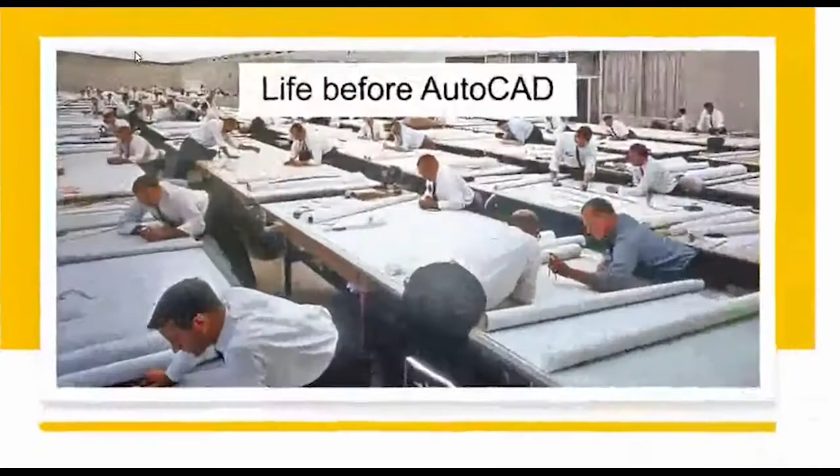Before we go into BIM, we have to understand what life was like without BIM. This is life before AutoCAD, and there was life before that too. Cave dwellers had to draw something in order to build it - the people rebuilding the insides of caves or building huts weren't doing it out of their mind. They must have created some kind of drawings, even if on sand or papyrus leaves or birch, or all the things people used to write or draw on.

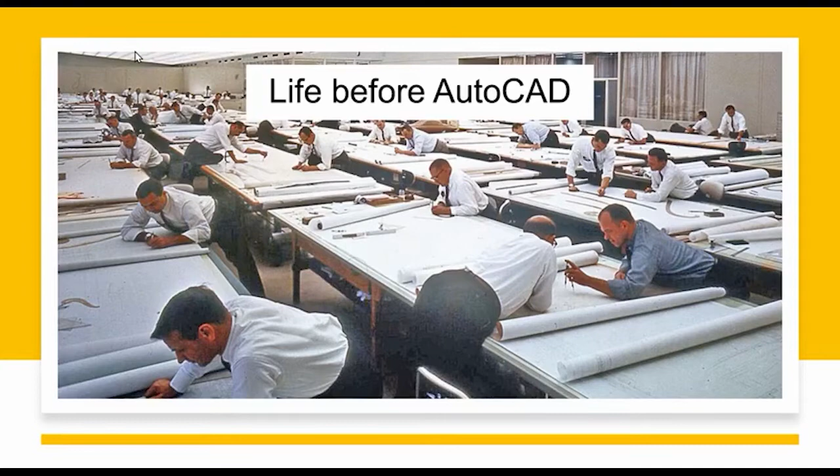Then we invented paper and started using it as a medium to draw lines and shapes denoting certain elements in construction. It's still lines - a thick line means structural wall, a slightly narrow line would be an architectural wall. Or you have to write it down: this is a structural wall, it has so many things, and you have to write the general notes - this much thickness, this much concrete, what grade of concrete, this much steel, internal plaster, external plaster, etc. You have to write these down just by looking, because if there are no letters or dimensions, you will not know what this wall is.

And then what happened? Computers came, and with computers we had AutoCAD. Nothing changed - this is very important to know. The guys who were building huts were drawing on sand or some other medium, then paper came and we did the same drawings on paper, and when computers came we used computer programs to draw those same lines and shapes.

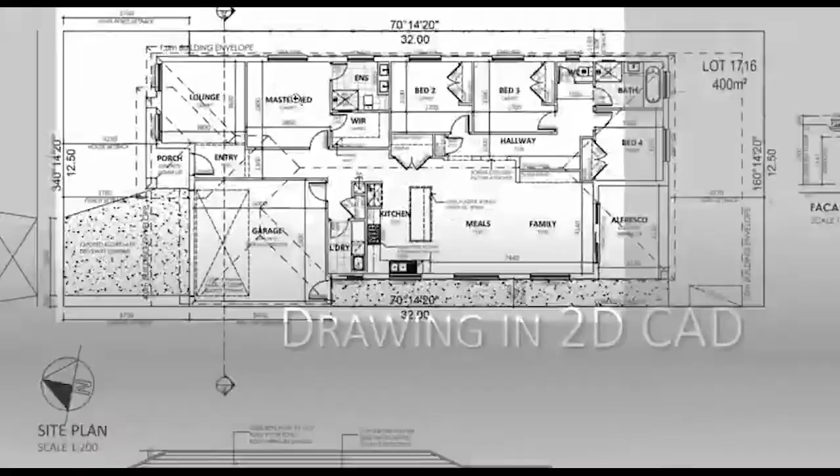If I take away all these writings, how would anyone know what these stand for - what this wall is, for example? We realized we were spending so much time doing this, and then spending a huge amount of time again because the guys in construction actually building it realized what you had drawn had so many mistakes - because the structural engineer refused to coordinate with any of the mechanical or electrical engineers or architects.

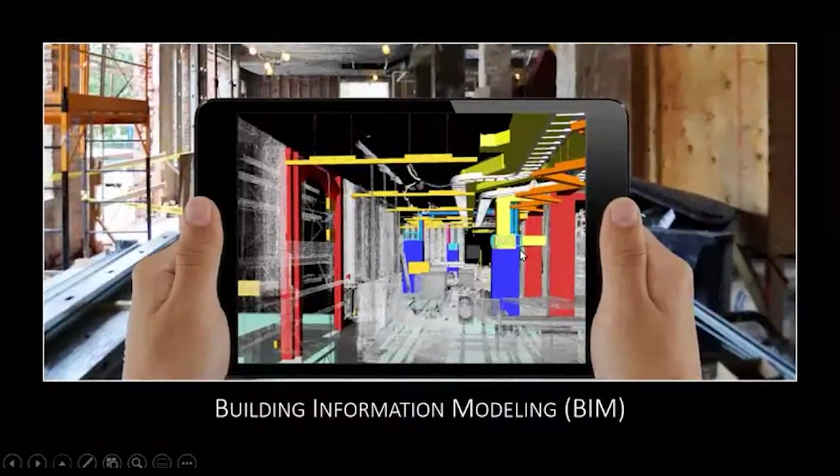But then came building information modeling. What changed? You put the information within the elements. So rather than drawing lines and shapes, people are putting the information there itself. This particular column here will have all the information regarding it - the steel used, the concrete, the grade of concrete, the fire rating, everything, including scaffolding if required - so that what you see is what you get. If you see a clash or confusion in coordination here, it will reflect here, so it's easier to solve.

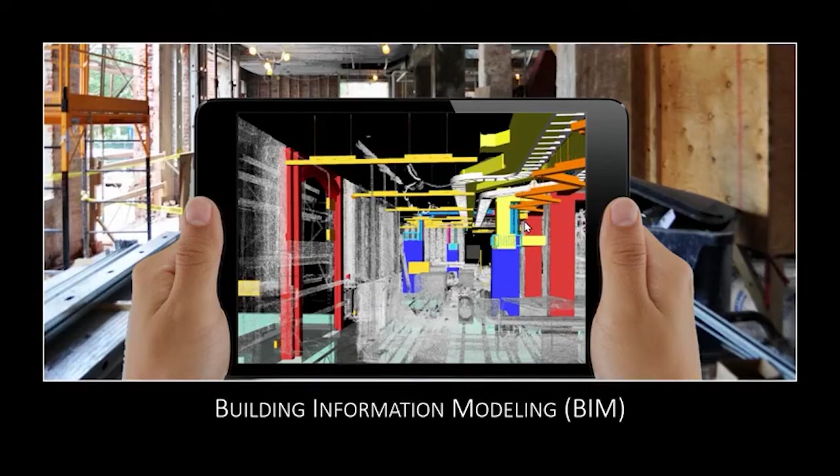So what are we doing? We're creating a digital double. We are constructing a building in a simulated, computerized environment, finding out all the problems associated with it, and once you've found the problems and solved them, you take out all the quantities, cost, everything, and then actually go on site and build it. It's like a genie in a bottle, making a replica of the same building in the next plot.

And now, especially with this COVID situation and people working from home, cloud collaboration has become very important. It was there in all parts of the world where BIM was used, but now even in India - because your consultant based out of Singapore will not come to India right now - so if you have to coordinate with that consultant, you'll have to do it via cloud.

Your architects could be in Ahmedabad, your structural engineer could be in Punjab, your general contractor would be at the project site - maybe your site is in Delhi - your facade design architect would be in Singapore, and your mechanical electrical engineering company would be in Bangalore. How do you see all of these models together? You see it via cloud collaboration.

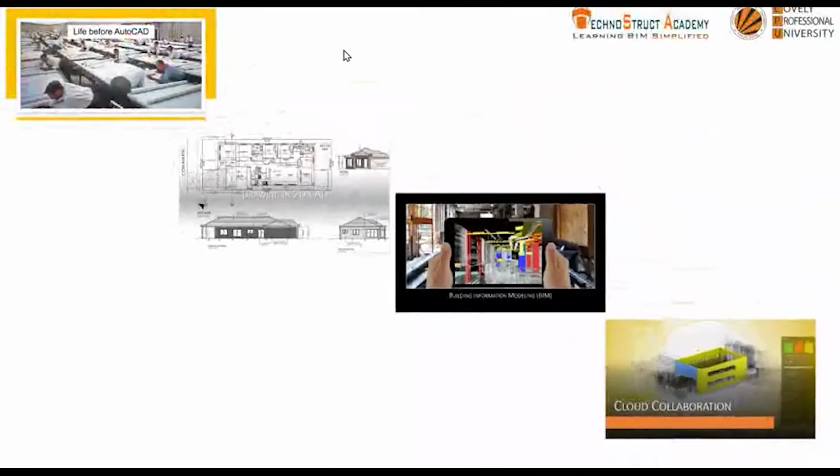In BIM, we talk about levels or LODs, whichever way. If you're in the US, you'll talk about LODs, which is level of detail. If you're in the UK or India, you'll talk about levels. Level zero is nothing, it's just a dot, scratch, there's no X and Y coordinate.

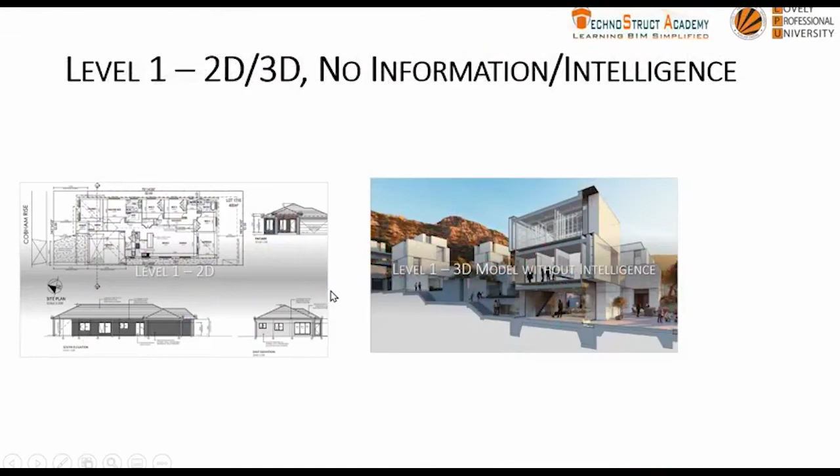Level one is partial collaboration. For example, you will have your 2D CAD drawing, or your 3D model without intelligence, like a SketchUp model or a Rhino model, where you can see the shapes but the shapes have no data. We see all of these images everywhere, like when we see buildings and houses.

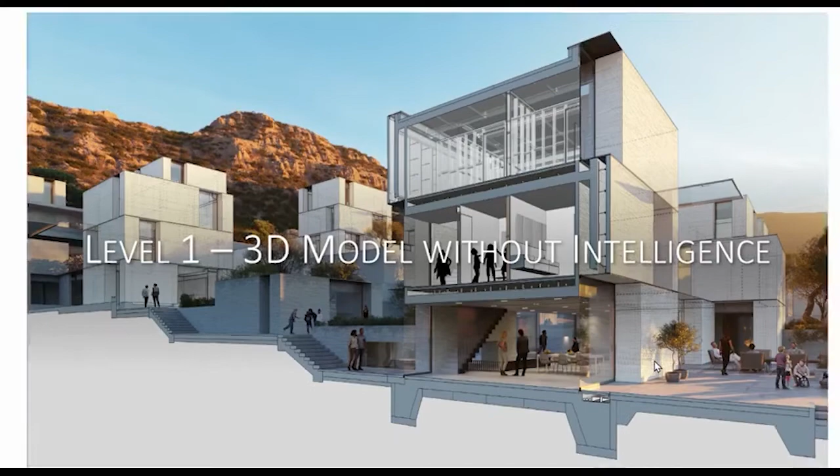In the next level, everybody's creating their own different model. For example, we have intelligent models. The architects are creating their own model, the structural guys are creating their own model, the mechanical, the plumbing, the fire, they all create their separate models.

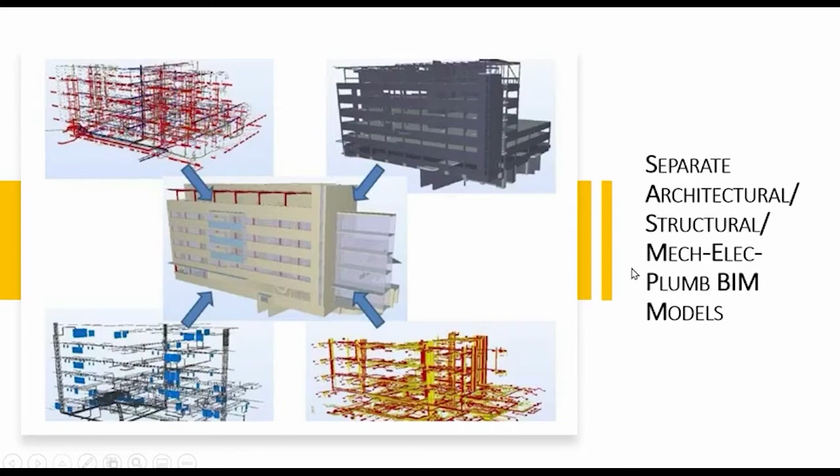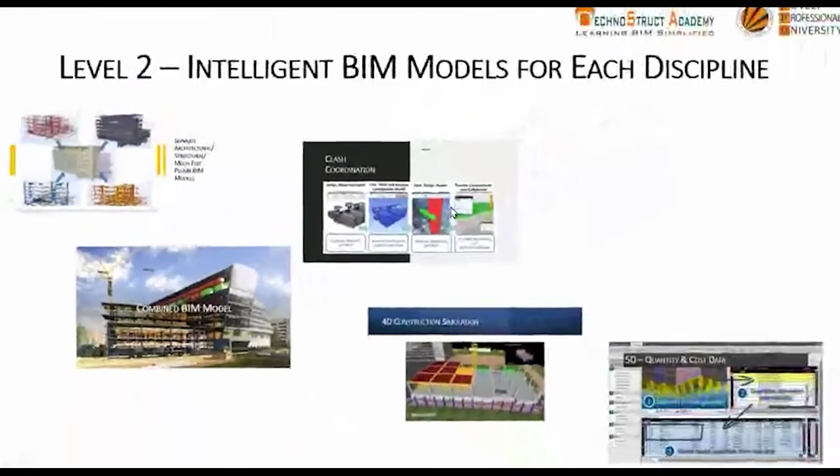And then we create a central model, and put them all together, maybe in Navisworks, like you see here. All the different elements of the model are here: architecture, structure, mechanical, electrical, plumbing. Then you use software like Navisworks to do clash coordination.

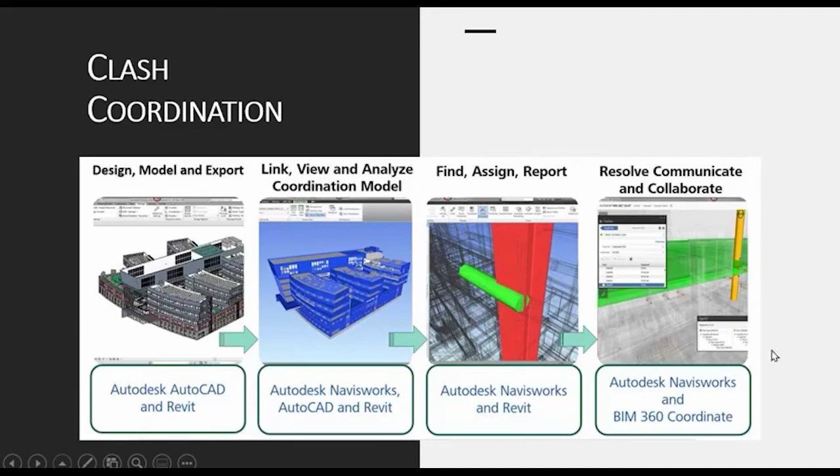At the onset, you can use AutoCAD and Revit to see if there are any problems between the drawings and the model. Then you can use Navisworks, AutoCAD, and Revit to link, view, and analyze the coordination model, and understand all the clashes. You see the clashes here, it's very common on a construction site. Then you can resolve clashes and collaborate on the cloud, which we'll come to in a while.

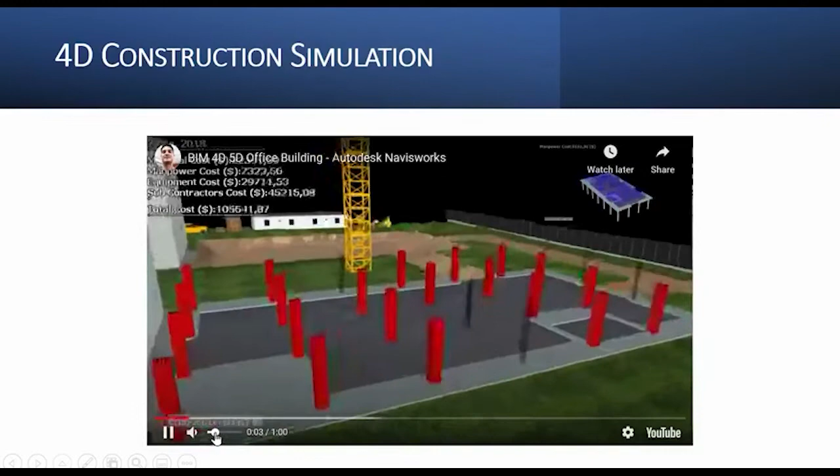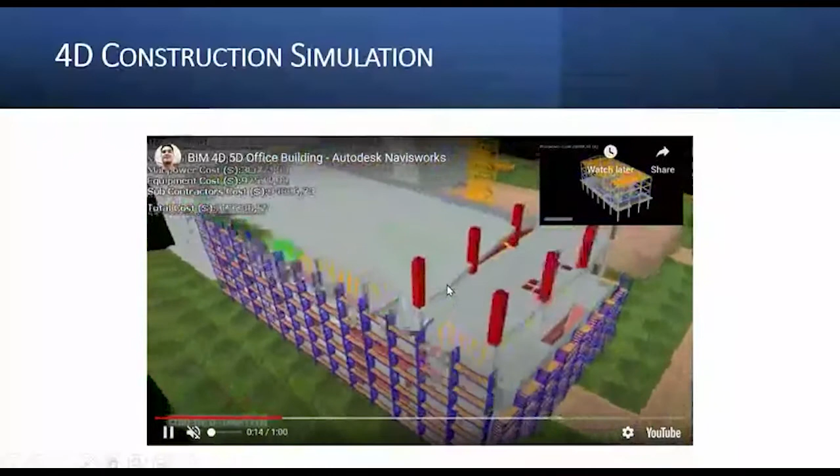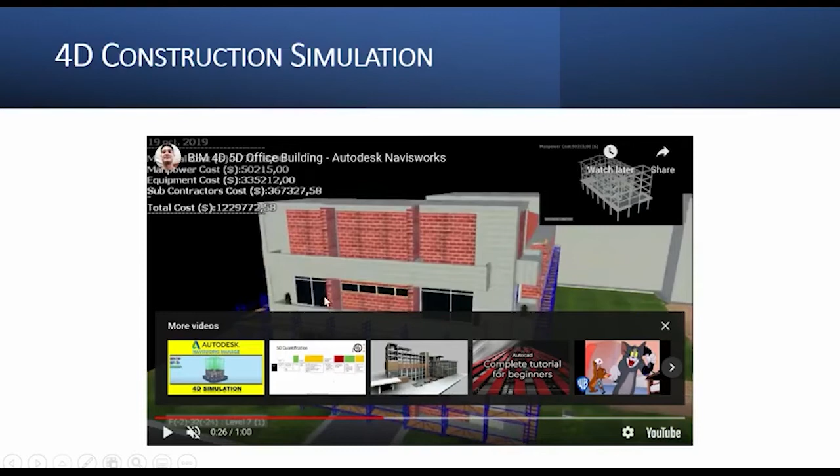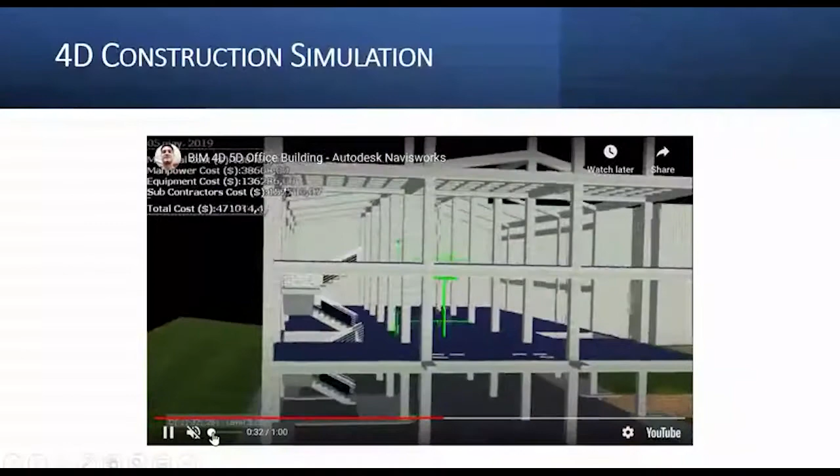If I pause it here, we will see on a specific day, 19th October 2019, the equipment cost is this much, subcontractor cost is this much, the total cost is this. And we can see how it is going, how it should look on each day. This is called 4D, or construction sequence, basically a project timeliner.

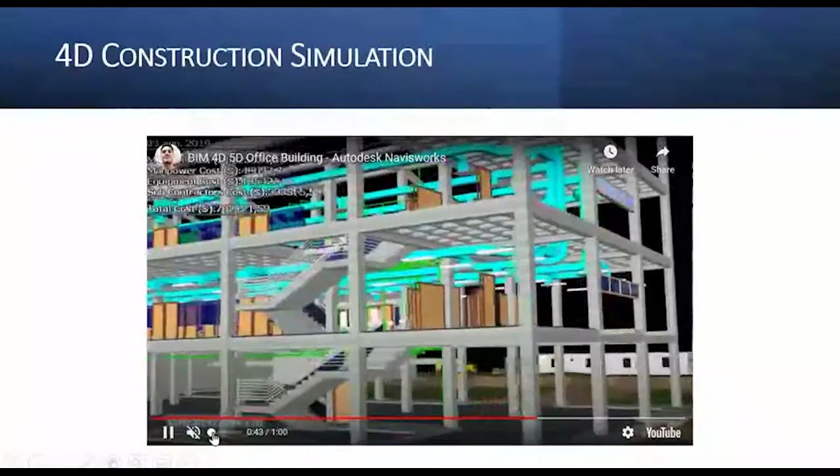For example, let's understand on this date, if we have anticipated that this building should look like this, these are the areas which should have been completed, these are the areas which are still pending, this and that.

However, if we take this plan and go to site, and then we realize the areas that were supposed to be completed 5 days from now are already completed, which means we will soon find material shortage. Or if it is going very late on site, then we will have an issue with warehousing, where we have more materials than we need, because we are going behind schedule.

Now, if you are in a metro city, especially a very congested city like Mumbai, you don't have place for warehousing. So that can be a huge challenge.

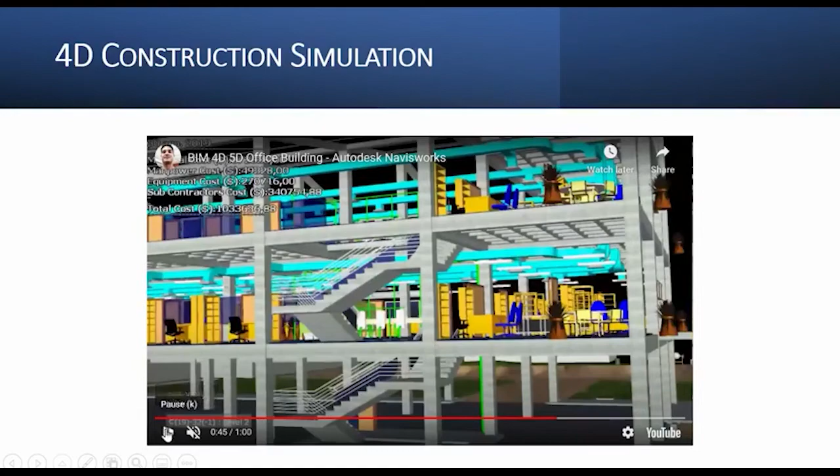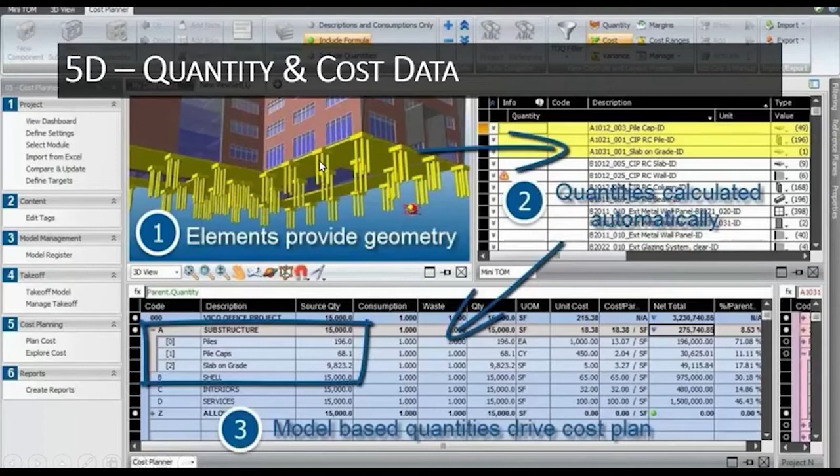So let's go back and understand the other elements in level 2 BIM. It's cost and quantity data, which is 5D. From the models, you have created all these elements in the model, and because you have put all the information of the elements here, you can calculate your quantities, which is automated.

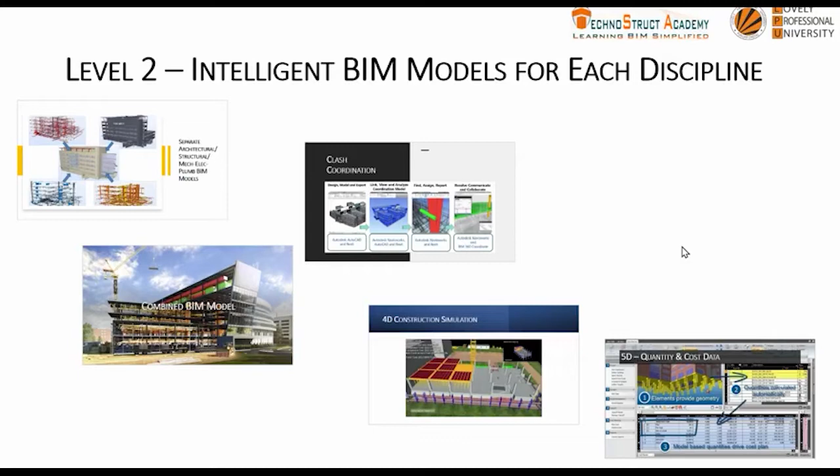Okay, so that's the difference.

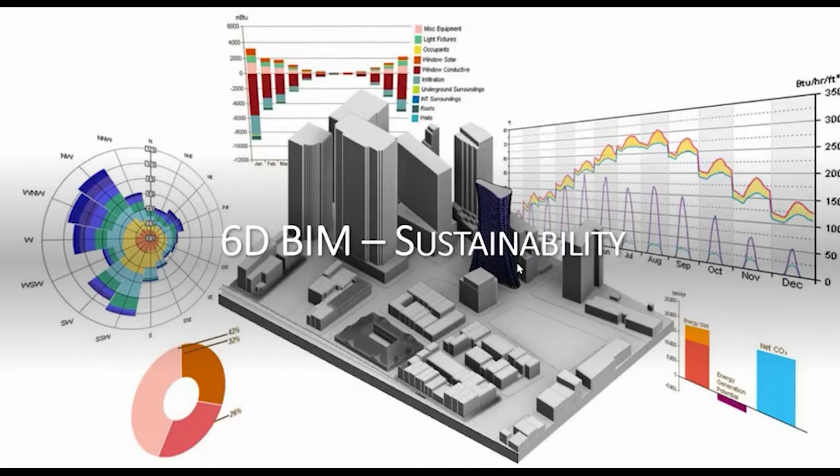What is level 3 BIM? Level 3 BIM is 6D or sustainability, where you can use the model to do a lot of calculations, from sun path analysis to analysis on what the carbon emissions are going to be like - basically what your carbon footprint is, and how it's going to fare over a certain period of time, how the building is going to work or not work - and cloud collaboration.

Now the difference between level 2 BIM and level 3 BIM is in level 3 BIM we are not creating separate architecture, structure, M and E models. We are creating a central model, and the architecture work and everything is on the cloud.

For example, we can use BIM 360 Glue, BIM 360 Docs, BIM 360 Plan, Field, BIM 360 Coordinate, and we can use Civil 3D, AutoCAD, Revit, Navisworks, and BIM 360 for design review, and all of these things happen in a central file.

So you have role-based access control for people. A mod guy who is modeling will have editable data, but he or she might not have data on cost. So likewise you can separate out everything. It's like if you've ever used a file sharing server like FileZilla or something, you'll know what I mean.

But this is very important, because most of you are students here, and by the time you pass out and get into one of these larger companies like Atkins, AECOM, WSP, or some Indian firms like L&T, GMR, Jacobs, or any of these, you'll have to work on collaborative environments. It's better to understand these now than later.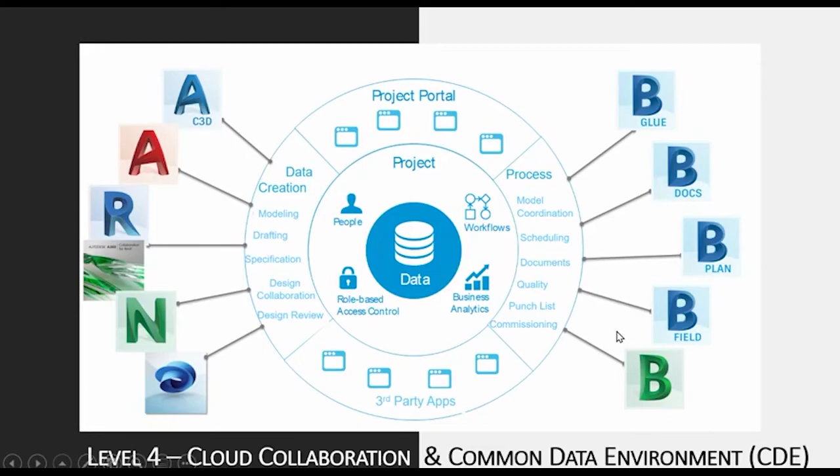So let's understand this - the life cycle of the project, from design to simulation to specification, procurement, construction management, facilities management, future flexibility. We talked about informing best practices, project collaboration. Everything is happening in a cyclic environment and in a single source environment, which is very important to understand, as we are seeing everything changing very fast.

We are now talking about implementing AR, VR, and MR - augmented reality, virtual reality, and mixed reality - in the construction space. We are doing it, maybe not as much in India, but the irony is it's being done by guys like us who are Indians, but we're doing it in other countries. The opportunities in India are growing at a very fast pace, but not there yet.

So we've come back to what sort of projects are using BIM. BIM in metro projects in India - people think it started with Nagpur Metro, but it actually did not.

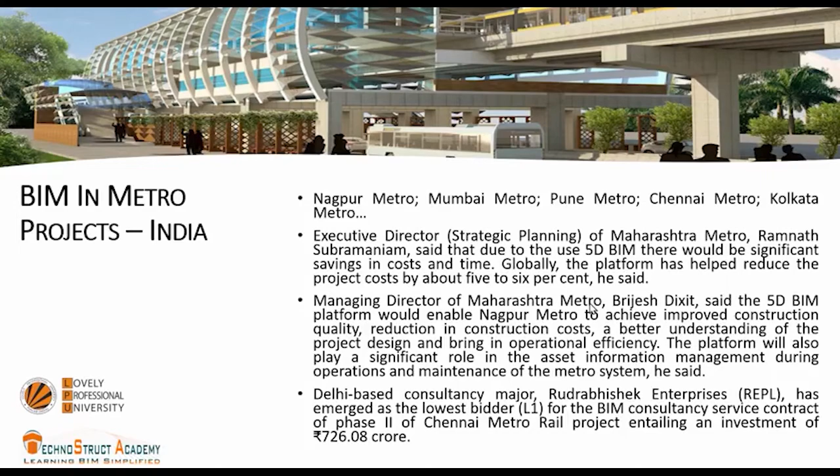The first airport to use BIM was T3 terminal of Indira Gandhi International Airport. It wasn't very successful at the time because BIM was new in India, and as Indians, we had a huge labor surplus even then, so we did not like embracing technology. We don't like new things.

Other than new phones. So the first fully utilized airport where BIM was fully used was Guwahati International Airport. The Airport Authority of India has mandated BIM for any future airports coming up. The Jewar Airport coming up in Greater Noida is 100% on BIM. It's been won by a Swiss or French company, I don't remember, and they have to use BIM. Bangalore International Airport Terminal 2 also has to leverage BIM for sustainability.

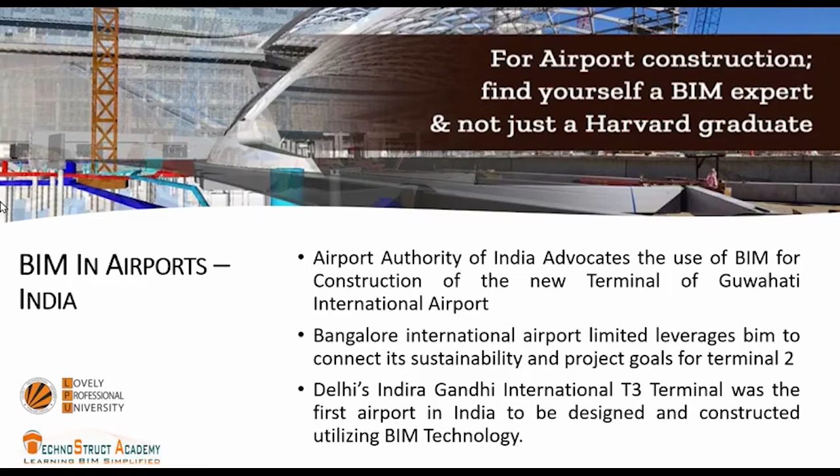And residential, which we think is the biggest chunk, is using the biggest amount of BIM. So if you go to any of these big cities - Delhi, Gurgaon, Noida, Faridabad, Ghaziabad, Mumbai, Pune, Nashik, Chennai, Bangalore, even Kolkata - you will rarely find a tier one, top tier developer who is not using BIM, from Emaar to DLF. DLF mandates all its projects on BIM for a very long time.

The younger daughter in DLF is a big advocate of BIM, and she used to come to these meetings as well. Oberoi Realty in Mumbai, Hiranandani, all of these big developers across India, and all the big general contractors who have worked internationally, like L&T - IL&FS is gone now - Shapurji, they're all using BIM.

So the question is not whether BIM is getting utilized in India. Is it going to be part of the curriculum in engineering? Yes, if not today, tomorrow, definitely. If you go to any reputed construction management master's course, there will be a chapter on BIM, at least one module on BIM. It might not be great, but there will be.